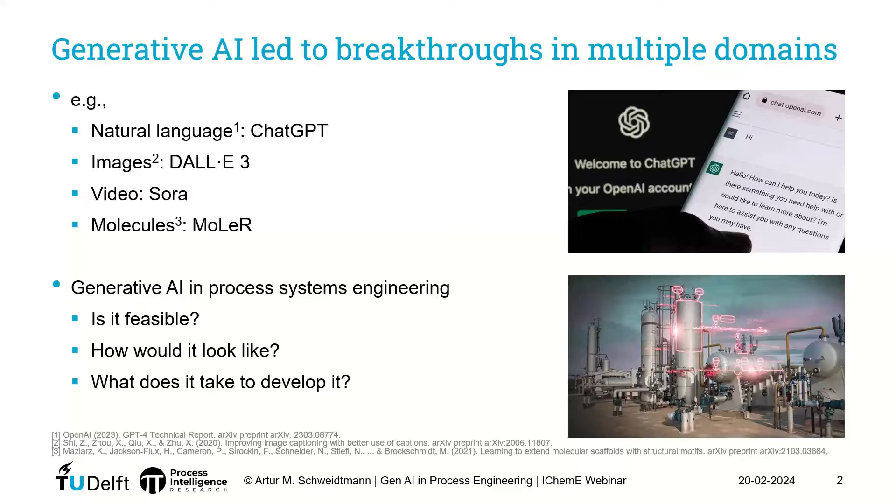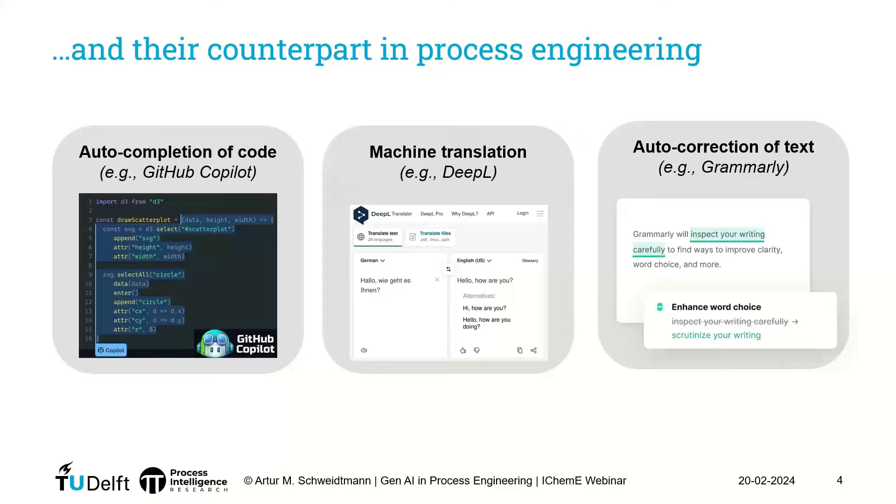So what I would like to propose today is a vision of how to use generative AI in process engineering. And the first example is how can we think about a tool that is doing autocompletion for process engineers. And well, what we propose is exactly that. So we propose a new model that is auto-completing chemical process flow sheets.

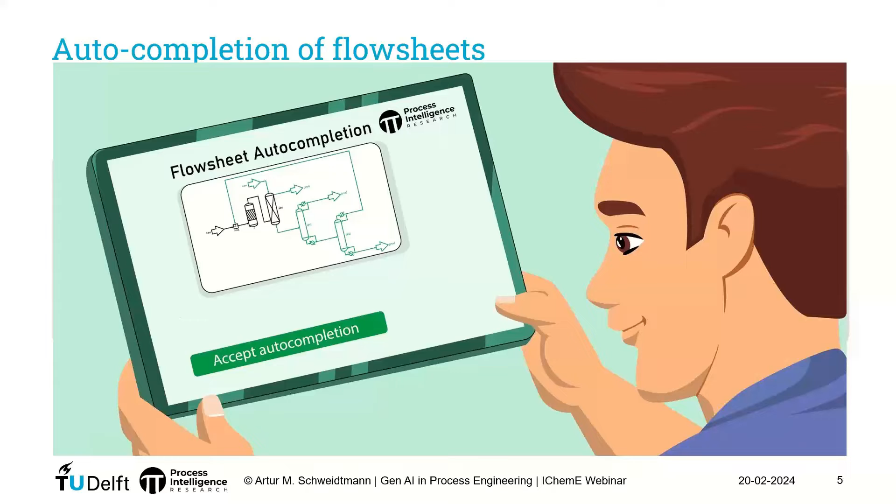So the idea is that you as a human engineer start to develop your process here, for example, in Aspen Plus, and then the software will automatically suggest the new topology, new unit operations, as well as operating points, design points, and so on. So really a tool to accelerate development.

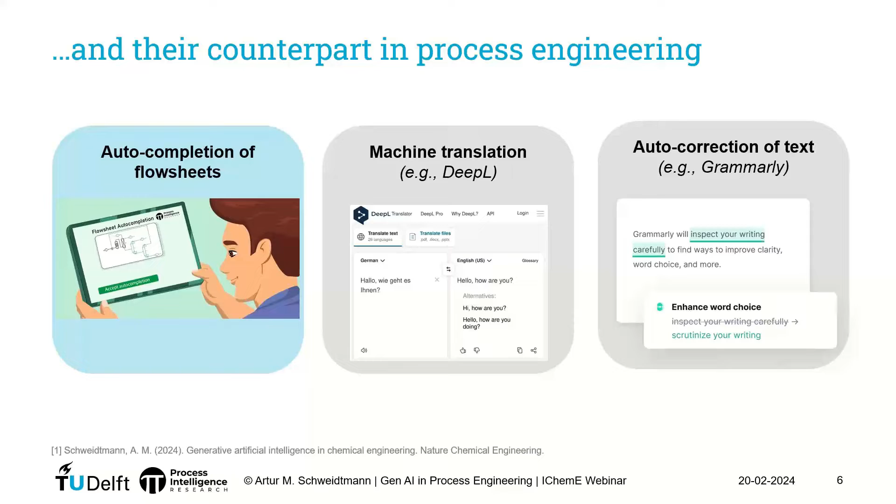So next question is, what would machine translation be in our domain? And this is a bit more tricky because as engineers, we work with P&IDs, PFDs, with engineering diagrams. We don't work too much with different languages here.

However, what we propose is to cast the development process of P&IDs, so piping and instrumentation diagrams of chemical processes, as a translation problem. So the idea is that, let's say, the early development phase of a chemical process, for example represented as a process flow diagram, PFD, we can cast as one language, and then we can say, hey, a P&ID, a piping and instrumentation diagram, we can understand as a different language.

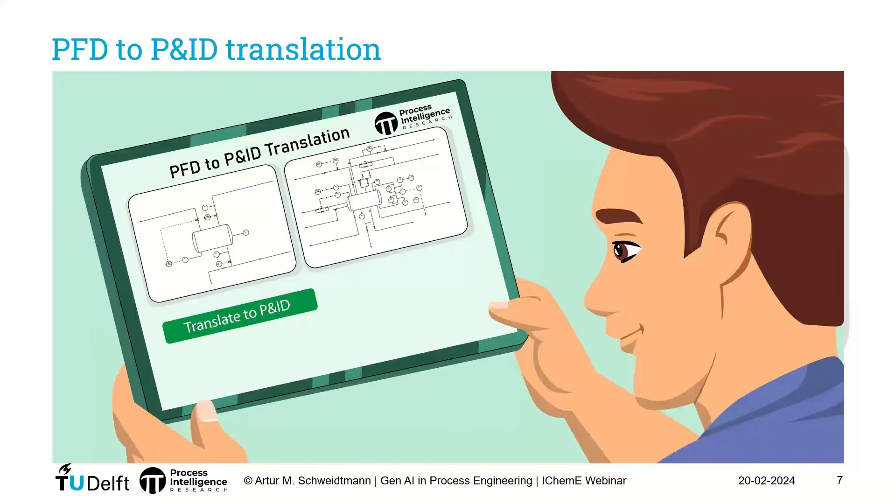And by thinking about this as being a translation problem, translating a PFD to a P&ID, we can basically develop a generative AI algorithm that is helping us to do this translation for us or with us. This way, we can train generative AI algorithms to develop P&IDs.

And the third counterpart is relatively obvious now, probably. So what we do is we envision an algorithm that is automatically correcting engineering documents like P&IDs. And it's not only about finding the obvious errors, it's also about analyzing the context, and it's also about giving a reason why this might be an error, and then giving the human the possibility to check that, confirm that, and so on.

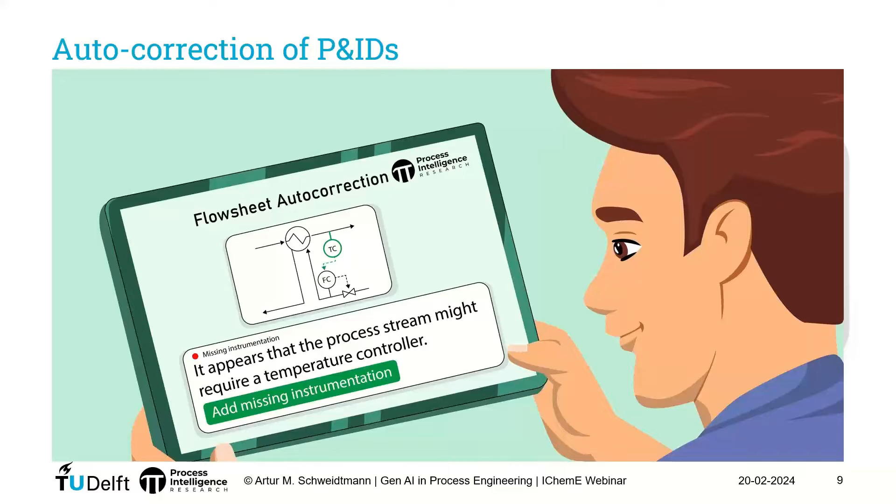For example, here, a controller is missing, so you as a human can check that, you can add the missing instrumentation, or you can say, I want to ignore the suggestion. So these are the three generative AI applications I want to go through today in my talk.

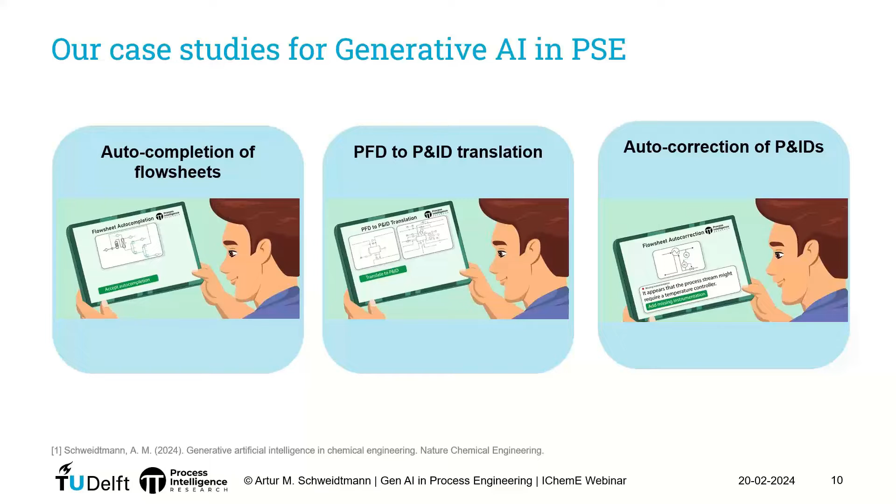But the big question is, if we have this idea, if we have this vision, what does it take to actually develop it, to implement generative AI? And if you look at what is happening in the literature, in other domains, usually generative AI is based on some combination of big data, information representation, and model architecture. And people used to add computing power here. I don't add that here because that's now given essentially, at least for our problem sizes.

So if we look at one example, ChatGPT here, what we see is, yes, ChatGPT indeed is based on big data, several terabytes of data. It is indeed representing information in a meaningful way. In that sense here, it's text. And ChatGPT has really been possible essentially due to a specific machine learning architecture, which is a transformer architecture.

So the questions I would like to answer today in my talk is essentially, if we want to develop such an application in process engineering, do we have big data? How do we get it? How do we represent our information in a meaningful way? What model architectures do we need?

And if you think about it, there's also one point that is differentiating us as the chemical engineering domain from other domains, which is we have mechanistic knowledge. So there's an additional question, which is, how can we utilize this existing knowledge, and how can we integrate that into our generative AI applications? Because this knowledge is usually not existing, or not existing in a structured way for existing applications like ChatGPT.

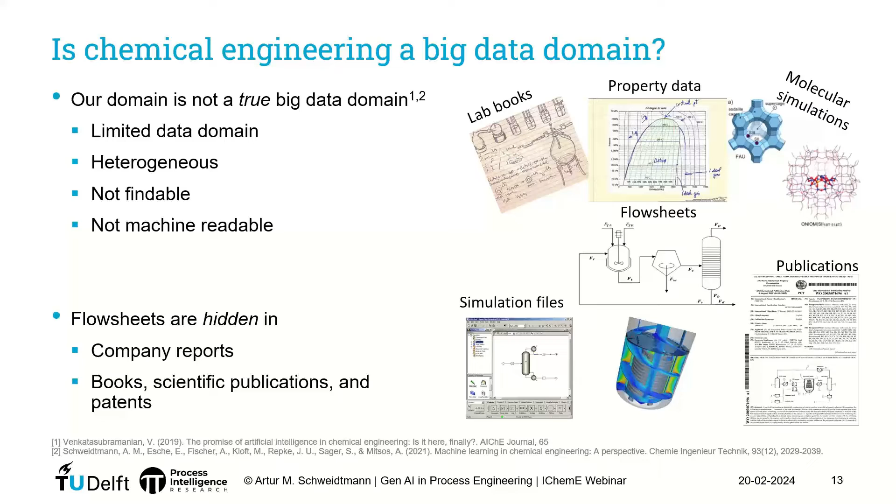And having this list, what we can do is we can use APIs, so application interfaces of the publishers, in order to download all the PDF documents of the corresponding publications and patents. So by doing this, we can essentially mine the internet and extract all chemical engineering publications ever published. So this gives us a pile of millions of PDF documents.

However, what we are interested in at the moment is essentially the chemical process flow sheets. And these flow sheets are usually images. So what we do is we extract the images. And that's a relatively straightforward task because they're embedded in the PDF documents, so it's relatively easy to automatically cut them out. And then this gives us millions of different images. And only a very tiny fraction of those are actually relevant for our application here. So only a few of them are showing us the topology of a chemical process flow sheet.

So what we did is we trained an image classifier. So this is itself a machine learning model. And that's a standard example that many people will show you if they talk about machine learning. You have an image of a cat, you have another image of a dog, you show the machine learning algorithm the image, and the algorithm will tell you whether the given image is a cat or a dog. So here we basically trained an algorithm to detect flow sheets. You give it an image, it will tell you this image is a flow sheet or it's not a flow sheet. From machine learning technology, this is very established already. It's relatively easy to set up and it just works.

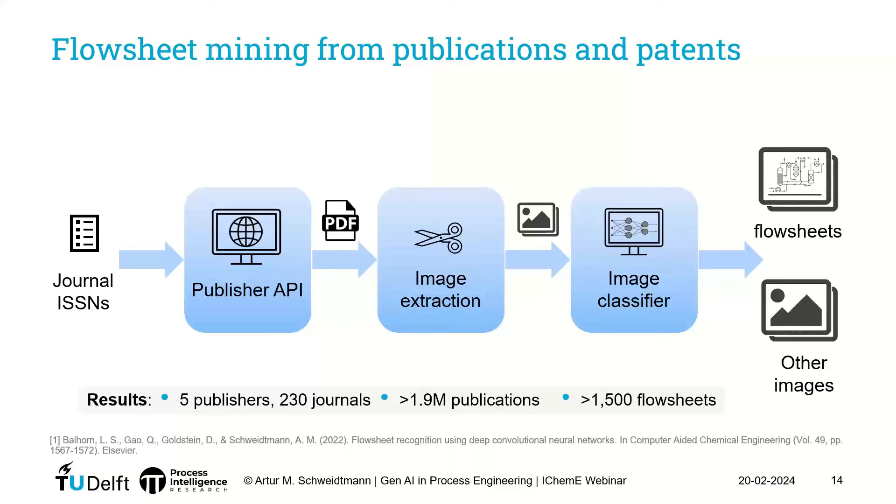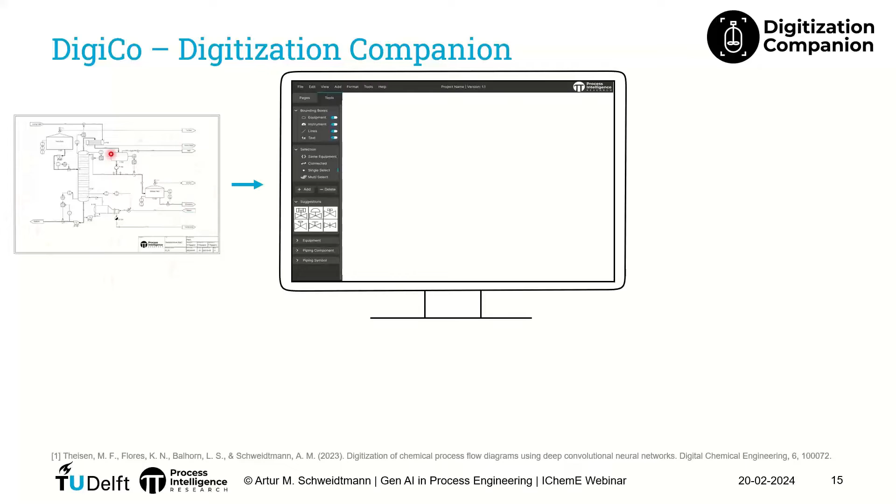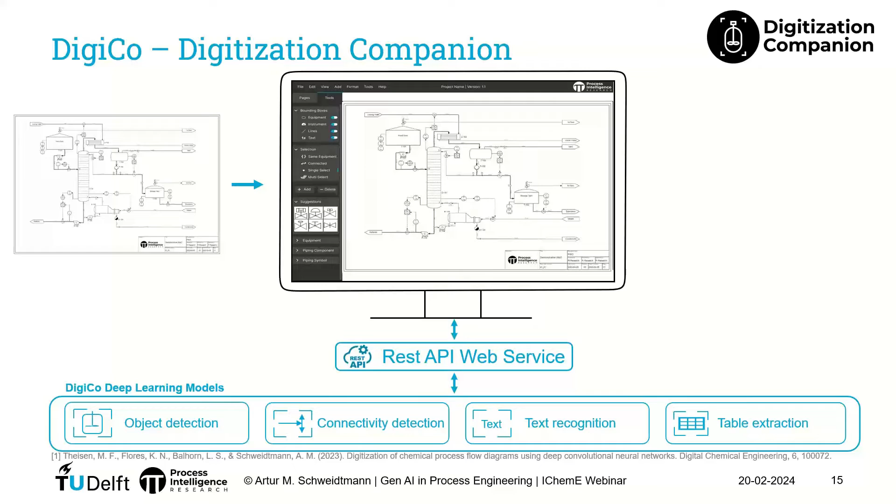So what we developed very recently is the software called DigiCo, Digitization Companion. Here we have a software where you can read in an image of a P&ID or PFD. And then our software is connected to a number of machine learning algorithms that we developed. These include algorithms for object detection, a computer vision algorithm that is able to detect over 500 different objects or symbols on a P&ID, with algorithms to detect the connectivity between these symbols. So combining those objects and the connectivity, we can basically translate the given image into a process graph. So we can extract the topology information.

We have algorithms to detect the text and contextualize it. So read in piping text, for example, as well as table extraction and information extraction from the title blocks. So by putting all of this together, running our models, we can essentially extract all the necessary information from paper P&IDs, from PDFs, from scans, and so on. And we can translate that into smart P&IDs in different formats. For example, DEXPI, which is the data exchange standard for the process industry, one standard format for representing flowsheet or P&ID information.

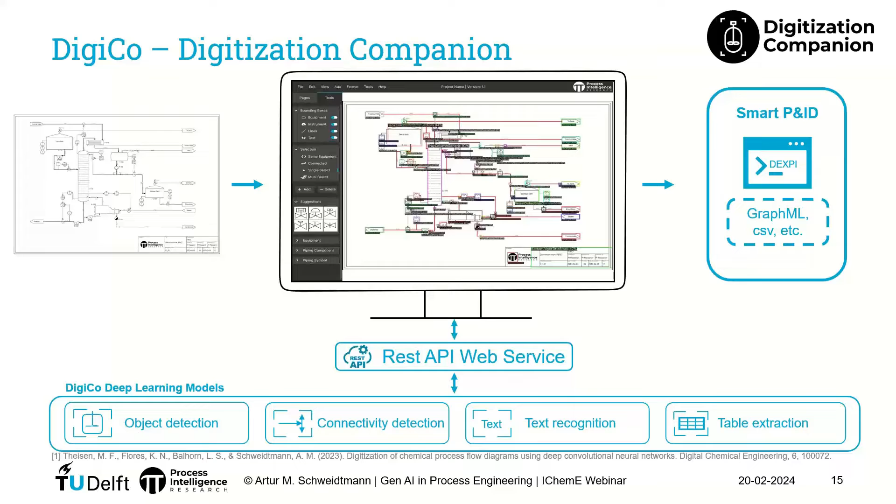So by doing this, like in the public domain, the data mining, or in the commercial domain, collecting all the information at a company and then digitizing that, we can get this big data, the digital flow sheets that are needed in order to develop generative AI on the process flow sheets.

And the next step is the information representation. So the question is, how can we represent the flow sheet information in a way such that a machine learning algorithm can actually work with that? And that's not a trivial problem, because for a very long time, people used to train machine learning algorithms only on scalar or vector inputs, right? It was always mapping a number to another number or vector to another number. So that's a classical regression problem. And in the chemical engineering domain, this is the kind of machine learning that is very commonly used.

However, now that we want to represent a flow sheet as an input to a machine learning algorithm or as an output to a machine learning algorithm, stuff gets a bit more challenging, right? So we need to think about how we can represent our information in a way that machine learning algorithms can deal with. And one relatively obvious way to do this is a flow sheet graph.

And that can be as simple as representing each part here, each unit operation of a flow sheet, as a node, right? And then putting that together, we get some kind of directed graph representation of the flow sheet. And then if you want to add additional information, for example the type of unit operation, the concentrations, the design specs of the units, and so on, you can add a vector to each of these nodes. We call that additional feature vectors, and thereby you can basically represent all the necessary information. And that's the simplest example of a flowsheet graph.

What you can do as well is add additional information. You can use different graph concepts. For example, you can encode this information in hypergraphs, in knowledge graphs. You can use advanced data models like DEXPI or OntoCAPE for this, and then add more information and more complexity to the graphs. But the general concept is you can represent flow sheets as graphs.

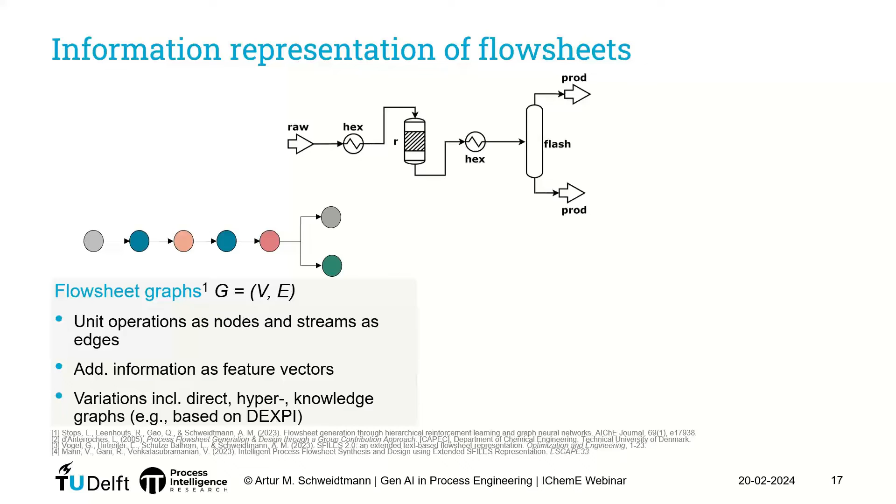Currently, this is still limited to topology information. Why am I highlighting this? Well, many of the generative AI algorithms are actually based on string inputs and string outputs. Why? Because they are based on human language. So by representing a flowsheet as a string, we can use a lot of existing machine learning technologies out of the box. Without big changes, without a lot of work, we can just plug them in, train them, and use them for our domain. So that's why I highlight these strings here. However, in the long term, it is a bit more sensible to use the graph representation because it's easier to include additional information there.

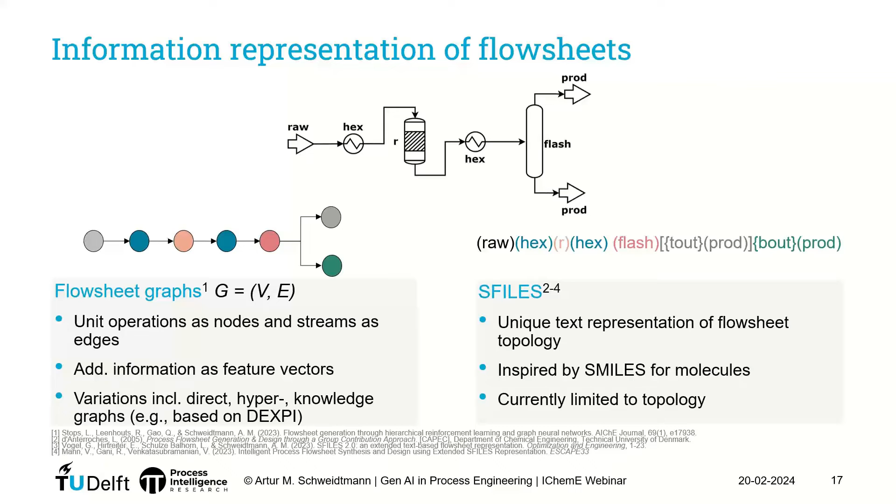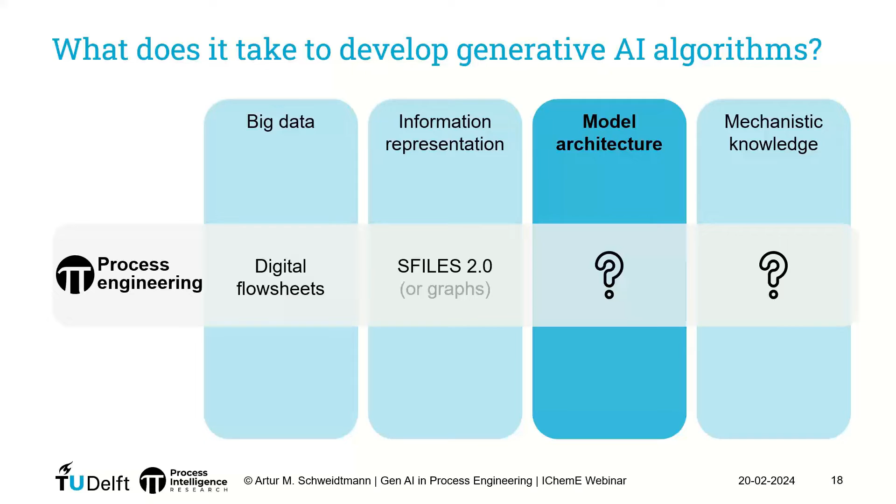So I already hinted at this a bit. If we think about information representation, that always goes together with the model architecture, because the model architecture depends on the information and the way it's represented. If we think about generative AI, most of the algorithms are somehow related to the transformer architecture and the attention mechanism. This is also the technology used in applications like ChatGPT. However, there are also a lot of other modern generative AI methods, based on generative adversarial networks, variational autoencoders, diffusion models, flow-based models. There are a lot of opportunities here.

What I would like to highlight is the conceptual difference between the standard transformer architectures and graph neural networks, because essentially they link to the different representations that I introduced earlier on. If you have your flow sheets or your information represented as text or strings, this goes naturally very nicely with the transformer architecture. If you represent your information as a graph, you need something like a graph neural network in order to process your information.

These graph neural networks have been used in chemical engineering quite a bit already, mostly for molecular graphs and molecular property prediction. However, we have recently also developed a graph neural network for process graphs, where we can learn from process graph structures and learn how to synthesize new processes. However, that will not be the focus of my talk today, so if you're interested in that, check out our paper. Today, all the models that I show you are essentially using SFILES, the string notation of flow sheets, and they also use some kind of transformer architecture. So they all work on text essentially.

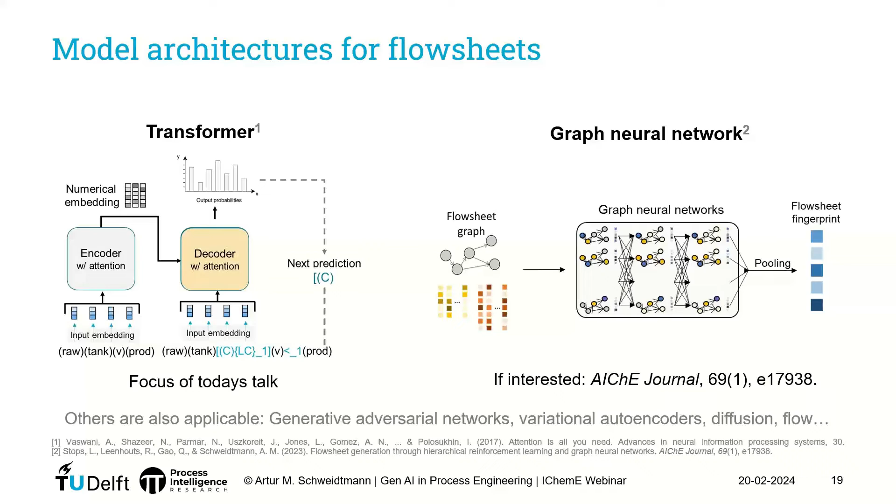So what I would like to do now is go through the 3 case studies one by one and show you our first results, or first demos essentially. The first one was the autocompletion of flow sheets.

So what we did here is first we started with a data set, and in particular we got a data set of around 200 real chemical flow sheets. Where did we get them from? Well, these are actually results of process simulation files. So we extracted topology information from process simulation files.

And in addition to that, we generated 8,000 synthetic flow sheets. So basically, we developed an algorithm to automatically develop synthetic flow sheets that are not real flow sheets, but similar to real flow sheets, and we use that in order to generate synthetic data. And our models have a vocabulary size of around 50, which means that we have around 50 different types of unit operations in our data.

And we used a GPT-2 model, which is a decoder-only model architecture, basically an out-of-the-box generative AI algorithm with a lot of parameters. So we have over 80 million parameters. As an input to this model, we put the incomplete process flow diagram, and the goal of the model is to predict the next unit operation.

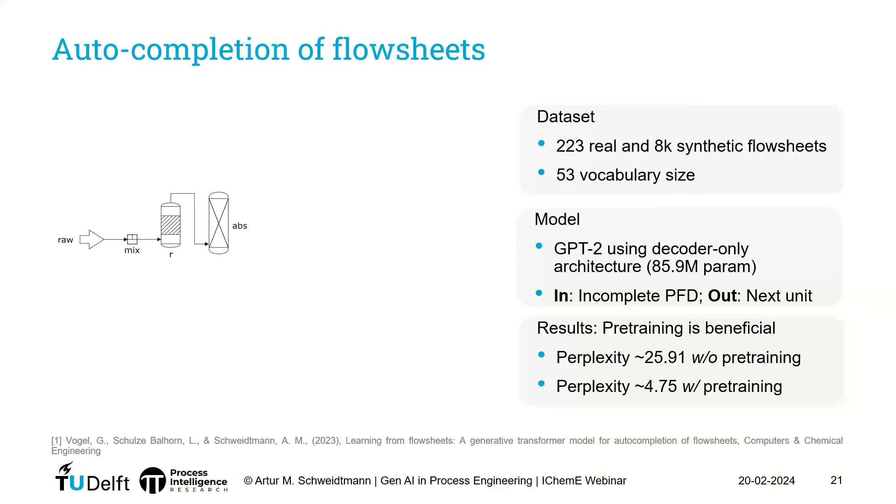So what is perplexity? Perplexity basically quantifies how close a predicted sequence, or predicted flow sheet in our case, is to the real flow sheet. So the lower the value, the better. So the pre-training helps actually quite a bit. And let's make one example here. If we start to put together this flow sheet here, the model would make this suggestion, for example.

So if you look at this, what you recognize is, first of all, it looks like a real flow sheet. It looks familiar, doesn't look like complete bullshit. However, if you go a bit into detail, what you recognize is it doesn't make complete sense. So for example, you could recover a solvent here.

So what you need to understand is this is a proof of concept. It's our first development in this area, the first paper in this area, and there are a number of limitations. The first and most important one is the algorithm is currently limited to the topology information. So we don't know what we want to produce in this process yet. We only know what you see here on the screen, right?

So you don't know what is a product, so therefore you can't really know what's the best way to separate it. You don't know the concentrations, the throughput, the quality requirements or the constraints. So at the moment, what the model is really doing is recognizing patterns in the topology of flow sheets. However, on the bright side, it's working. We come up with reasonable patterns, so we can learn from flowsheet structures.

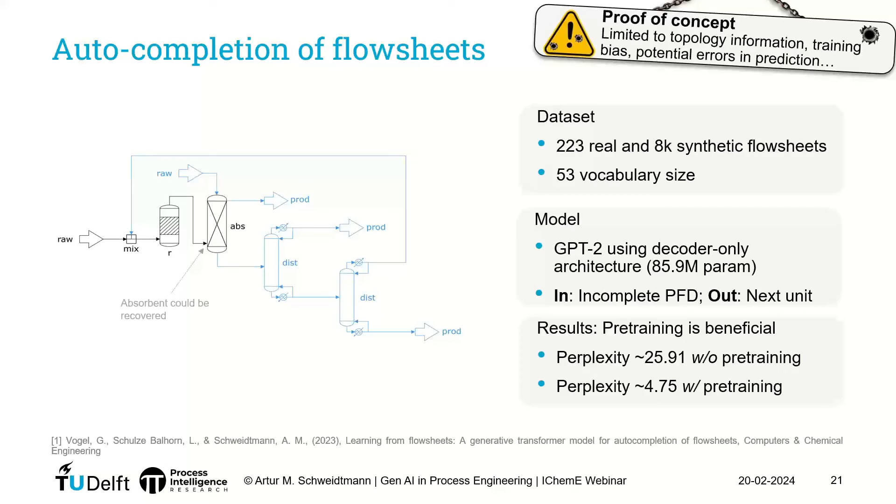So adding more information to the model is just a matter of putting the information in the right format, adapting the model architecture, retraining the models, and further developing that. The next application that I have is this PFD to P&ID translation. So how can we learn the translation process?

What we do here is, again, we generate a lot of synthetic data. Now even more data, so 100,000 synthetic flow sheets and 250 real P&IDs, flow sheets with control structure. We took a slightly smaller model, a T5 architecture, which is also a standard transformer architecture, essentially. And here the input of the model is the process flow diagram, and the output of the model is a process flow diagram with the control loops.

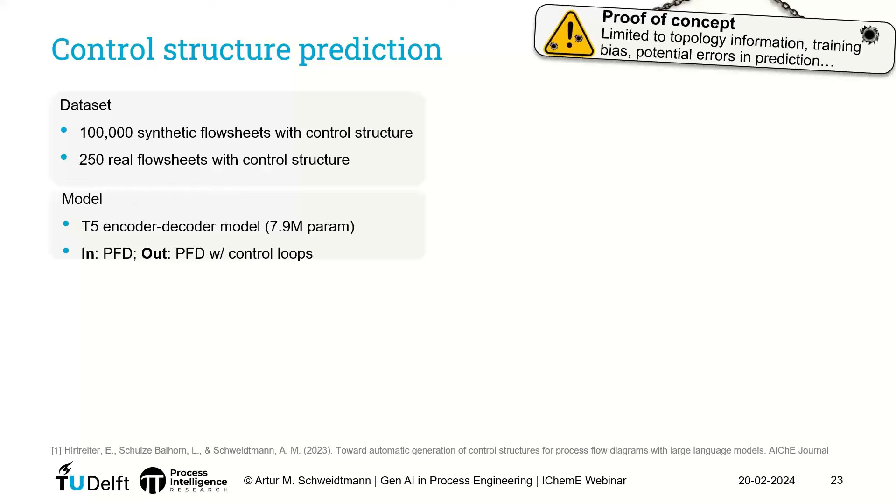If you go into more detail, you will recognize, well, it's not perfect yet, and it suffers from more or less the same limitations as the previous work. So at the moment, we only see the topology of the flowsheet. For example, we don't know if the product will be at the top or the bottom of the distillation column, which would have an impact on the optimal control strategy here.

However, we see that in general, machine learning algorithms can learn from flowsheets. In general, machine learning algorithms can make predictions for complete flowsheets with control architectures. So I believe this is an important first step towards automating the engineering process and helping the engineers to develop P&IDs quicker.

So now you might say, hey, 100,000 flowsheets, that's a lot of data. Do we have that? Do we need that? So we did a small study where we decreased the data amount in order to check the performance. With around 100,000 flowsheets, we have a top 5 accuracy of around 80%. If you reduce that to 10,000 flowsheets, we have an accuracy of around 65% at the moment. And with around 1,000 flowsheets, we are at around 0% accuracy.

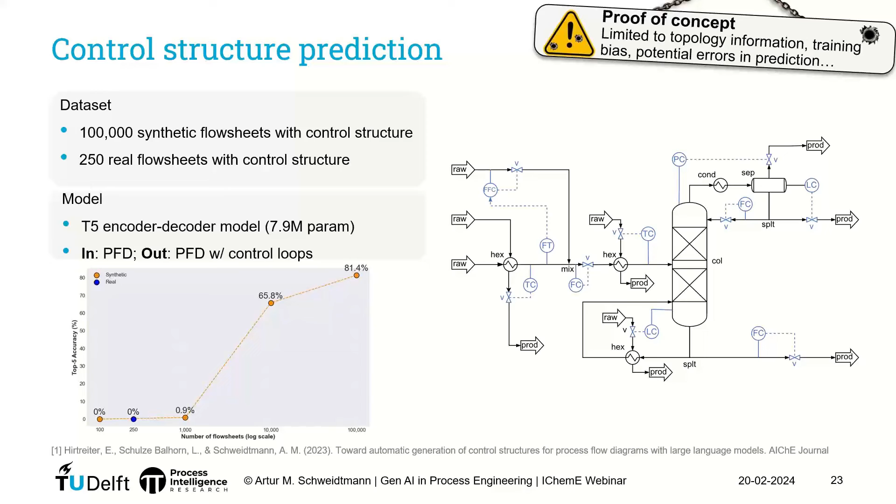And I brought an example here as well. So this is an example of one of the synthetically generated P&IDs. What you recognize is the P&IDs are put together based on rules, essentially. So we draw random patterns from P&IDs and put them together. So this one doesn't necessarily make sense. It doesn't produce a real product, but it serves as an example for training of the algorithm.

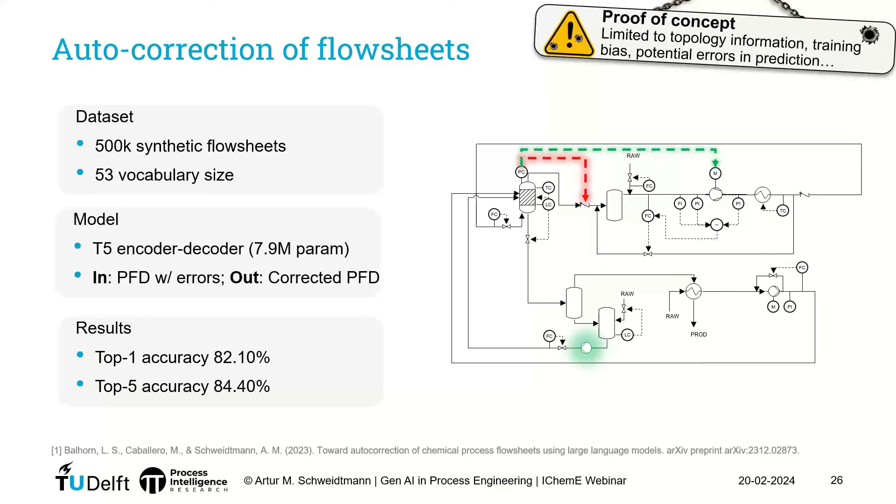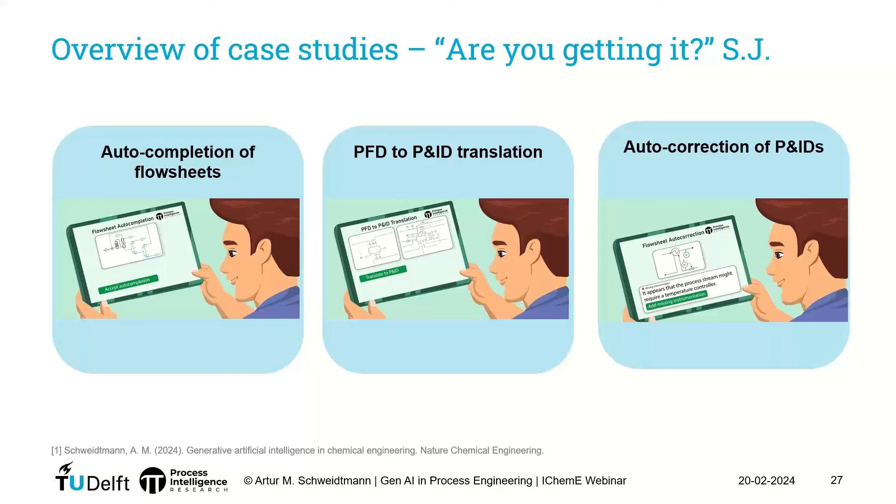So what I did is I essentially showed you 3 different applications of generative AI, right? The autocompletion of flowsheets, PFDs to P&IDs, and autocorrection of P&IDs. So what I would like to emphasize is, while these are 3 different applications at the moment, we want to put that together essentially. And this is inspired a bit by a talk that you have probably seen, maybe in 2007 even.

So I will just bring a small sequence here. I'm not sure if you can hear the sound as well.

Oh no, because we didn't preload it, I don't think.

So basically, you see Steve Jobs emphasizing his innovation of an iPhone in 2007. And there, the real innovation was not necessarily the individual functions, but was to put everything together, right? And that's what we work on at the moment. So we work on Pilot, which is a process intelligence learning and optimization toolbox.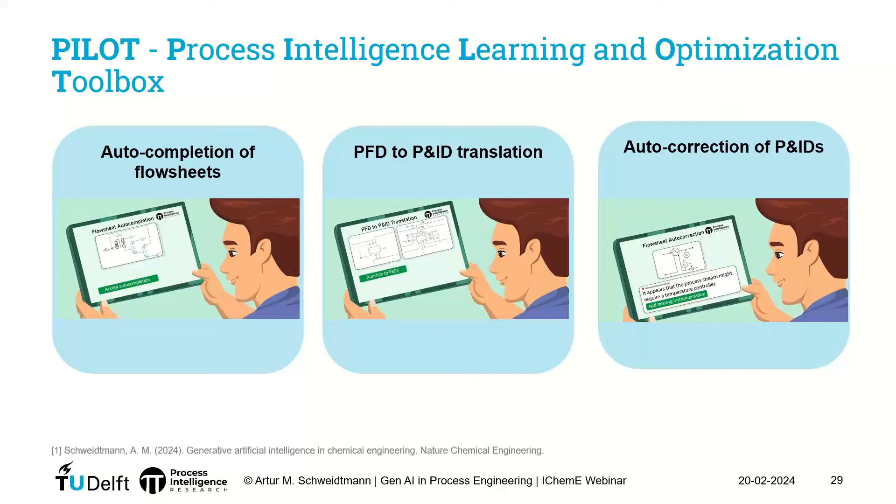And the idea is really that, a bit like foundational models that you see in text now more and more, we want to develop a foundational model for the process industry, where we combine all of these different applications and much more into one big model that is assisting process engineers in the future. And this model is integrating not only flowsheet information, but also different modalities of data. So we call that multi-modal learning usually.

So we are developing an AI algorithm that is integrating P&IDs, but also the actual sensor data, as well as property data, in particular a lot of information from reports, helping us to develop more efficient HAZOPs, and so on. And these algorithms are also able to execute simulations themselves, get the results, and use these results in order to answer questions from the engineers. And of course, with these kinds of models, you're also able to communicate in natural language, for example.

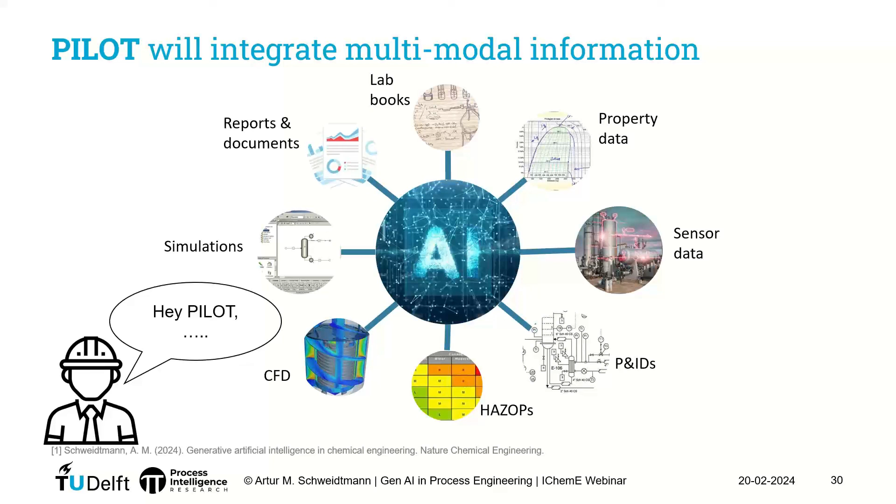So with that, I'd like to conclude my talk. What I showed you is that the digital engineering data is key for future AI applications. Without the data, well, we can't do a lot. I believe I showed you that machine learning algorithms can learn from flowsheets. This is a big breakthrough for my research, because we see the proof of concepts work, and therefore we can start to think about bigger next steps as well.

The data size matters, so the more data we have, the better. And here I'm looking in particular at the people from industry, thinking about models, how we can share data in order to make these models more powerful. And in my personal opinion, AI has a big potential to transform the chemical process industry.

And for those of you who were paying a lot of attention in the very beginning, you might be wondering that I forgot something, which is I promised you to also talk about the mechanistic knowledge, right? And I suggested that we should include that in our machine learning algorithms, but then in the application that I showed you, there was no mechanistic knowledge. There was just a lot of data, right? So the question is, should we include that knowledge or not? And if yes, how? So why didn't I show it here? The simple reason is because I didn't get there yet.

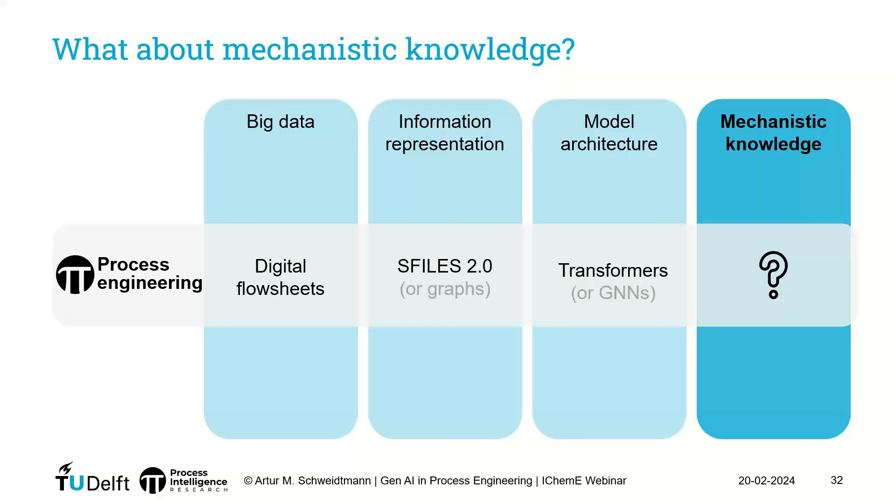I'm a strong believer in mechanistic knowledge. I'm a strong believer that we should include that and use that for our machine learning algorithms. But all of the topics here are still in the early research phase. So there are still a lot of scientific challenges that we need to overcome. And one of them is to include the mechanistic knowledge. But let me emphasize three of the main challenges.

The first one is, at the moment, we're ignoring all the knowledge. In the future, we need to leverage that, and that could be by including physical equations or rules in our machine learning algorithms. The current approaches are solely considering the process topology. And there's a fix to that, which is to leverage additional information. That could be DEXPI information, additional stream data, equipment data, simulation data. So you can add all of those to the machine learning models with a sensible data representation. That could be knowledge graphs, for example, and then you can learn from this as well.

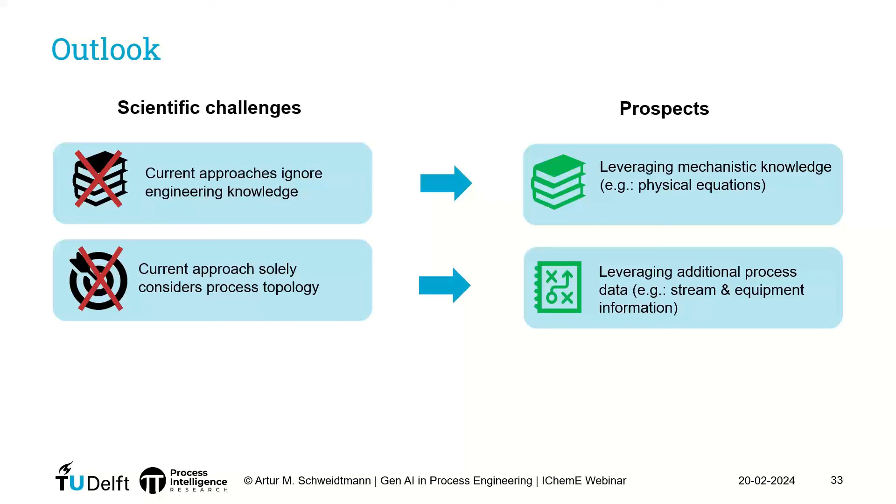Of course, AI is very data hungry, but we have some kind of lack of data. So we need to develop new techniques in order to reduce the data demand. That might be data augmentation, that might be synthetic data generation, but we also need to collaborate more on this. We need to think about ways we can share data so that confidential data still stays confidential, but we can still leverage the data of multiple companies, for example, for joint models.